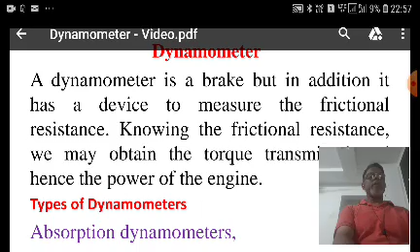Dynamometer is a brake, but in addition it has a device to measure the frictional resistance. Knowing the frictional resistance, we may obtain the torque transmitted and hence the power of the engine. In short, the dynamometer is a device by which we can measure the power of the engine.

There are two types of dynamometer: one is the absorption type dynamometer and another is the transmission type dynamometer. Absorption type dynamometer means the entire energy or power produced by the engine is absorbed by the friction resistance of the brake and is transferred into heat during the process of measurement.

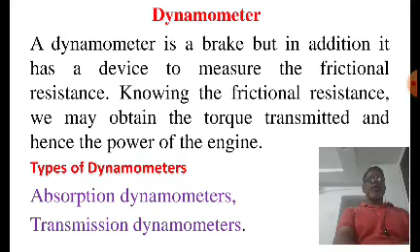Whereas in the transmission dynamometer, the energy is not wasted in friction, but is used for doing work. The energy or power produced by the engine is transmitted to the dynamometer or to some other machine where the power developed is suitably measured. First we will see the absorption type dynamometer.

In the absorption dynamometer there are two types: the Prony-Brake dynamometer and the rope-brake dynamometer. The first, the Prony-Brake dynamometer, is the simplest dynamometer. It consists of two wooden blocks placed around the pulley fixed to the shaft of an engine whose power is required to be measured.

The blocks are clamped by means of two bolts and nuts as shown in the figure. A helical spring is provided between the nut and the upper block to adjust the pressure on the pulley and control its speed.

The upper block has a long lever attached to it and carries a weight W at its outer end. A counterweight is placed at the other end, balancing the brake when it is unloaded. Two stops S and S are provided to limit the motion of the lever.

When the brake is to be put in operation, the long end of the lever is loaded with suitable weight W and the nuts are tightened until the engine shaft runs at a constant speed and the lever is in horizontal position. Under this condition, the moment due to the weight W must balance the moment of the frictional resistance.

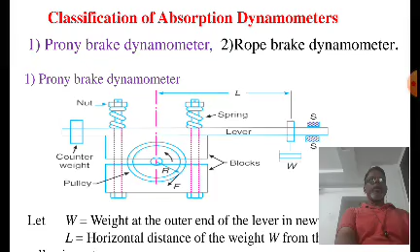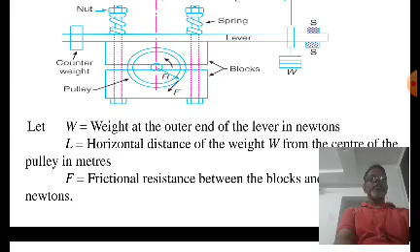So let us take weight W at the outer end of the lever, L the horizontal distance of W, and F the frictional resistance between the block and the pulley. R is the radius of the pulley, and N is the speed of the shaft.

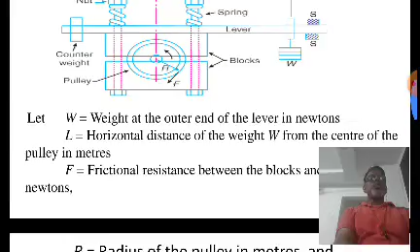We know that the moment due to this weight W into L is equal to the moment of the frictional resistance, that is F into R. And F into R is nothing but the torque. So the resistance or torque of the shaft, T, is equal to W into L, which is equal to F into R.

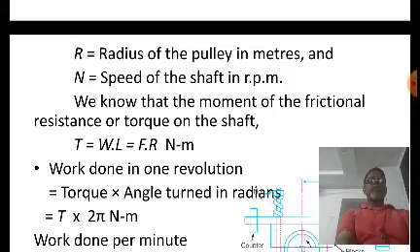So the work done in one revolution is torque into the angle turned in radians, that is T into 2 pi Newton meters. The work done per minute, if you multiply by speed, gives you the work done per minute, so T into 2 pi n Newton meter.

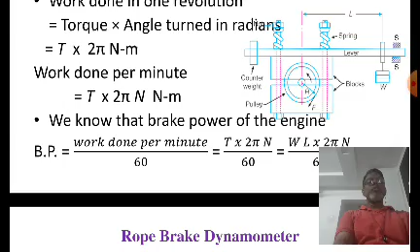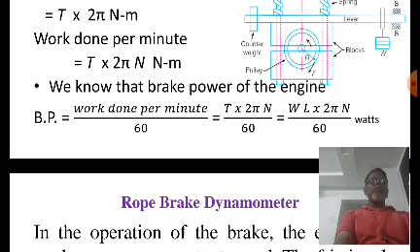So we know the brake power is the work done per minute divided by 60. That means if you convert that into work done per second, it is T into 2 pi n divided by 60, and T means W into L.

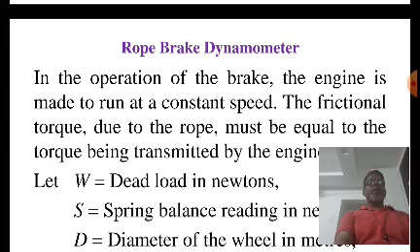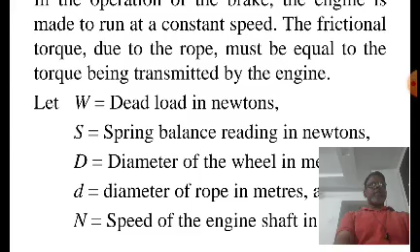The second absorption type dynamometer is the rope brake dynamometer. In the rope brake dynamometer, one, two or more ropes are wound around the flywheel or rim of the pulley fixed rigidly to the shaft of an engine. The upper end of the rope is attached to a spring balance, as you can see in this diagram, while the lower end is attached to the dead weight.

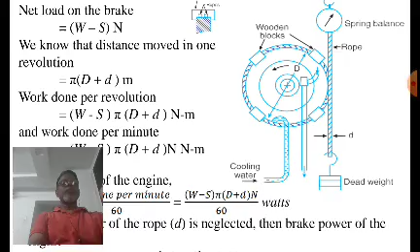In order to prevent the slipping of the rope over the flywheel, wooden blocks are placed at intervals around the circumference of the flywheel. You can see here that there are four wooden blocks kept around the flywheel to prevent the rope from slipping.

In the operation of the brake, the engine is made to run at constant speed. The frictional torque due to the rope must be equal to the torque being transmitted by the engine.

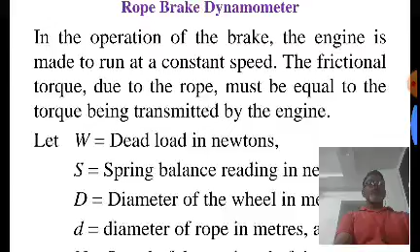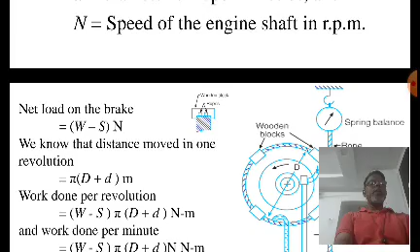So let us take W as the dead weight, S as the spring balance, D as the diameter of the wheel, small d as the diameter of the rope, and N as the speed of the engine. So the net load is the dead weight minus the spring load, that is W minus S, in Newtons.

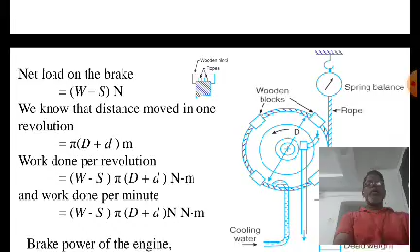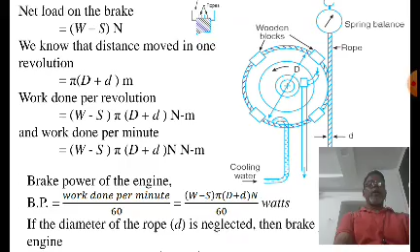Work done per revolution is W minus S into pi into bracket D plus d. Work done per minute is W minus S pi into D plus d into N, and therefore the brake power is work done per minute divided by 60.

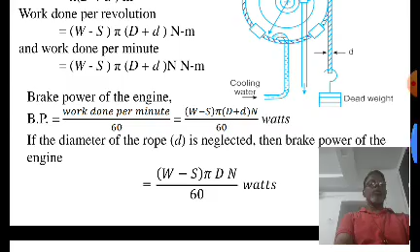So it is W minus S into pi in bracket d plus d into N divided by 60, and if you neglect the rope diameter, then it becomes W minus S pi into d into N divided by 60.

Next is the transmission dynamometer. There are three types: epicyclic train dynamometer, belt transmission dynamometer, and torsion dynamometer.

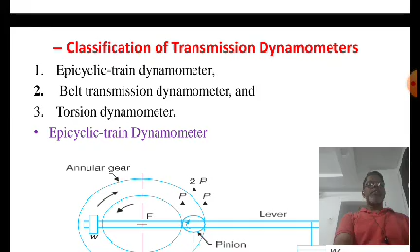In the epicyclic train dynamometer, there is a spur gear, an annular gear, and a pinion.

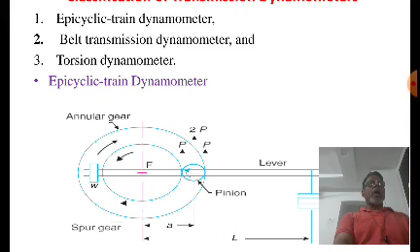The spur gear is keyed to the engine shaft, that means the driving shaft, and rotates in the anti-clockwise direction, as you can see in this diagram. The annular gear is also keyed to the driving shaft and rotates in the clockwise direction.

The pinion, or the intermediate gear, meshes with both the spur and the annular gear. The pinion revolves freely on a lever which is pivoted to the common axis of the driving and the driven shaft.

A weight W, small w, which you can see on the left hand side, is placed at the smaller end of the lever in order to keep it in position.

A little consideration will show that if the friction of the pin on which the pinion rotates is neglected, then the tangential effort P exerted by the spur gear on the pinion and the tangential reaction of the annular gear on the pinion are equal.

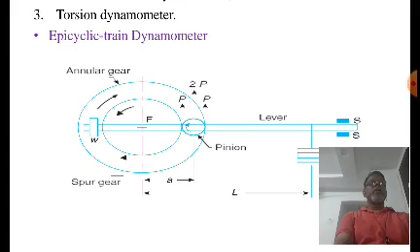You can see in this diagram that both forces are acting upward. Since these efforts act in the upward direction, the total upward force on the lever acting through the axis of the pinion is P plus P, that is 2P.

This force tends to rotate the lever about its fulcrum, and it is balanced by the dead weight W at the end of the lever, so 2P into small a is equal to W into L.

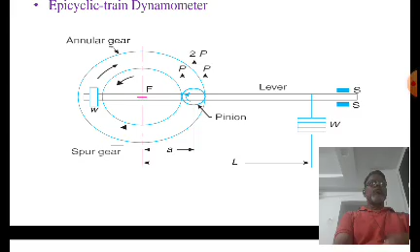So for equilibrium of the lever, taking the moment about the fulcrum F, 2P into A is equal to W into L, or P is equal to W into L divided by 2A.

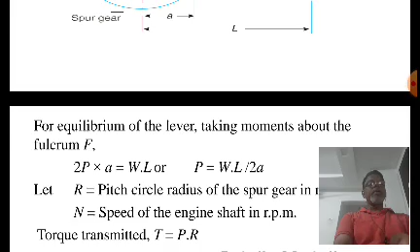Now let us take R, capital R, as the pitch circle radius of the spur gear, and N as the speed of the engine. So the torque transmitted is P into R.

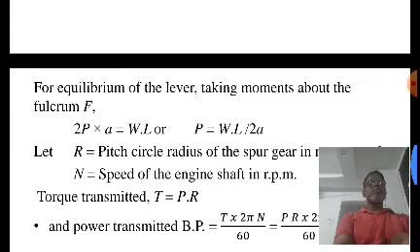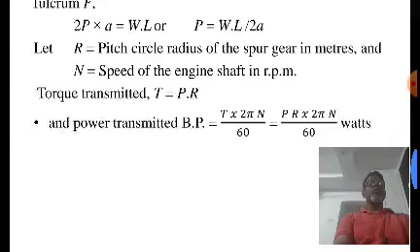The power transmitted is T into omega, that is T into 2 pi N by 60, where T is equal to P into R. And P can be calculated as WL divided by 2A.

So this is the epicyclic train dynamometer.

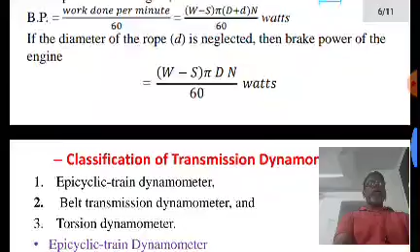Next is the belt transmission dynamometer, and under that, the Froude or Thornycroft transmission dynamometer.

When the belt is transmitting power from one pulley to another, the tangential effort on the driven pulley is equal to the difference between the tension in the tight side and the tension in the slack side of the belt.

There is another pulley B, called the driven pulley, mounted on another shaft to which the power from pulley A is transmitted.

The pulleys A and B are connected by means of a continuous belt passing round two loose pulleys, C and D, which are mounted on a T-shaped frame.

Since the tension in the tight side of the belt T1 is greater than the tension in the slack side of the belt T2.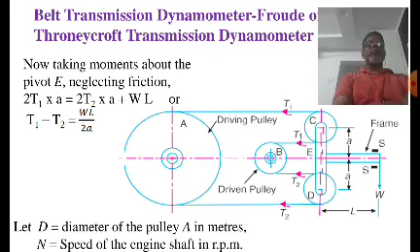So in order to balance this, now taking a moment about the pivot E, neglecting the friction, 2 times T1A equal to 2 times T2A plus W into L, and from this equation you can write T1 minus T2 is equal to WL divided by 2A.

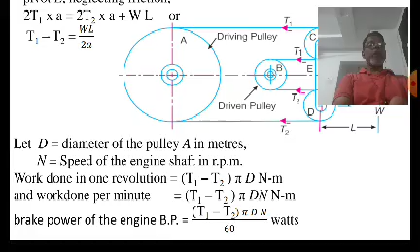Now let us take D, the diameter of the pulley A, and N the speed of the engine shaft. So work done in one revolution is T1 minus T2 into pi into D, Newton meter. The work done per minute is T1 minus T2 into pi D N, Newton meter. So the brake power is work done per minute divided by 60, that is T1 minus T2 pi DN divided by 60, which you get in watts.

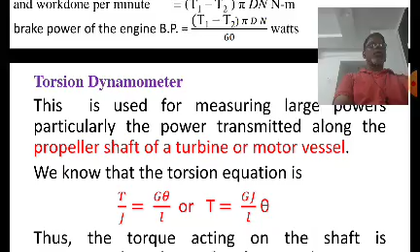And the third type of dynamometer in transmission dynamometer, that is the torsion dynamometer. This is used for measuring a large power, particularly the power transmitted along the propeller shaft of the turbine or a motor vessel. A little consideration will show that

when the power is being transmitted, the driving end of the shaft twists through a small angle relative to the driven end of the shaft. The amount of the twist depends upon many factors such as torque acting on the shaft T, length of the shaft, diameter of the shaft, and modulus of rigidity of the material of the shaft.

We know that the torsion equation is T by J equal to G theta by L, which you have seen in MOS, or T is equal to GJ divided by L into theta. Here T is the torque, G is the modulus of rigidity, J is the polar moment of inertia, L is the length of the shaft, and theta is the angular twist.

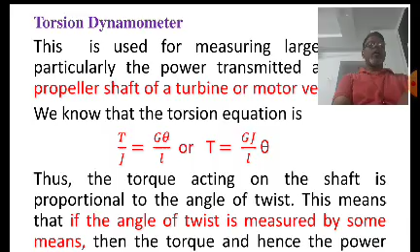Now GJ by L, this term is constant because G is a property of material, J depends on diameter, if diameter is fixed J is fixed, L is the length of the shaft, that is also fixed. So T is directly proportional to theta, and therefore if the angle of twist is measured by some means, then the torque and hence the power transmitted may be determined.

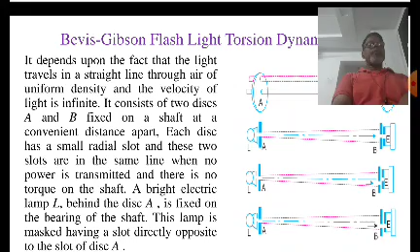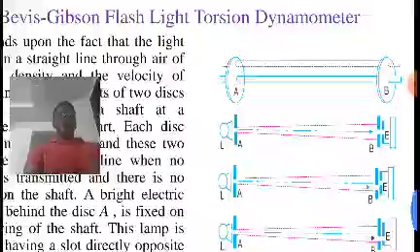Then the type of this torsion dynamometer, that is the Bevis-Gibson flashlight torsion dynamometer. Now this depends on the fact that light travels in a straight line through air of uniform density and the velocity of light is infinite. We know this.

In this Bevis-Gibson flashlight torsion dynamometer, there are two discs A and B fixed on a shaft at a convenient distance apart. Each disc has a small radial slot, and these two slots are in the same line. When no power is transmitted and there is no torque on the shaft, a bright electric lamp L behind disc A is fixed on the bearing of the shaft.

This lamp is masked, having a slot directly opposite to the slot in disc A. At every revolution of the shaft, a flash of light is projected through the slot in disc A towards disc B in the direction parallel to the shaft. And eyepiece E, you can see in this diagram, second diagram, is fitted behind disc B on the shaft bearing, and it is capable of slight circumferential adjustment.

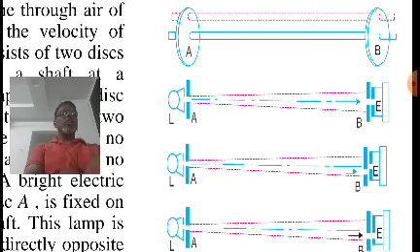When the shaft does not transmit any torque, a flash of light may be seen after every revolution of the shaft, as the position of the slits does not change relative to one another. Now, when the torque is transmitted, see the third diagram, the shaft twists and the slot in disc B changes its position.

So A and E are still in line. Due to this, the light does not reach the eyepiece. If the eyepiece is now moved around by an amount equal to the lag of disc B, then the slot in the eyepiece will be opposite to the slot in disc B, and hence the eyepiece receives a flash of light.

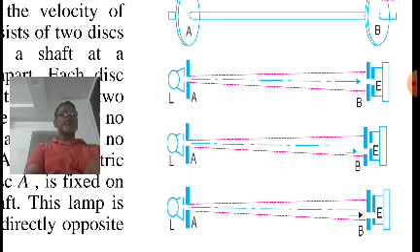The eyepiece is moved by operating a micrometer spindle, and by means of scale and vernier, the angle of twist may be measured up to 1/100th of a degree. Right, so this is about it.

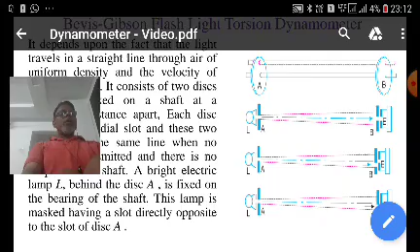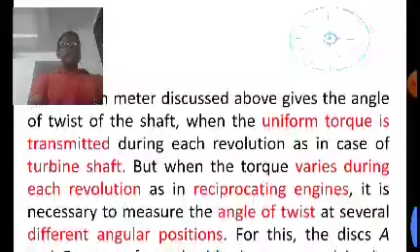Now this torsion meter discussed above gives the angle of twist of the shaft when uniform torque is transmitted during each revolution, as in the case of a turbine shaft. But when the torque varies during each revolution, as in a reciprocating engine, it is necessary to measure the angle of twist at several different angular positions.

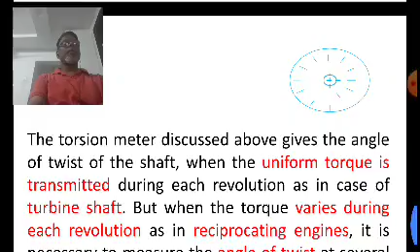For this, discs A and B are perforated with slots arranged in the form of a spiral. You can see in this diagram, these are the slits provided here, but arranged in spiral form. So if there is a variation in torque during the revolution, then you have to use the slitted or perforated disc like this.